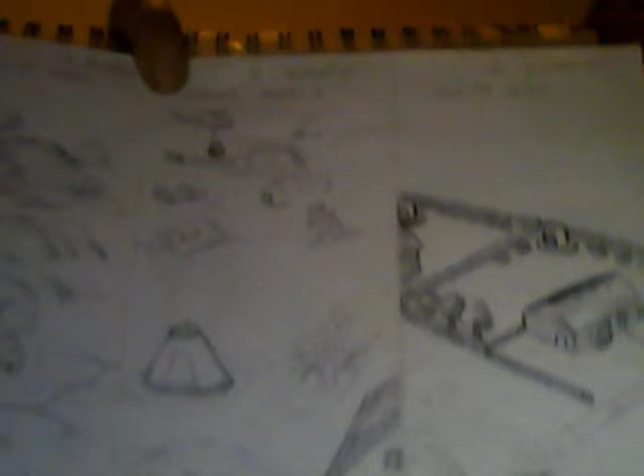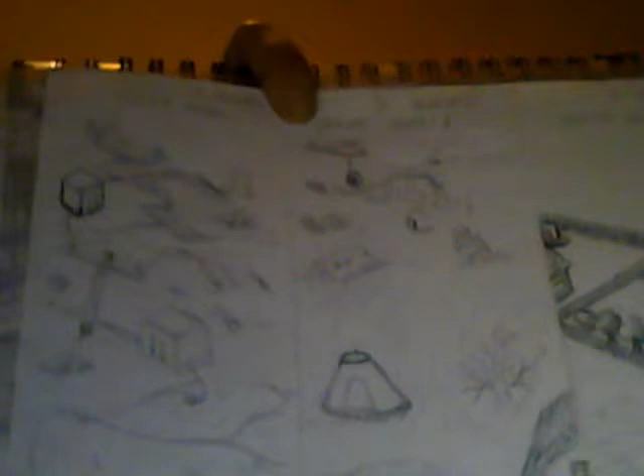First, I'll talk about the Stage 1 life pod, and then we will address the Stage 2 life pod that can be deployed from helicopter, plane, or boat. And then the Stage 3 life pod that can be deployed also by plane, helicopter, or boat to areas that are cut off for rescue or assistance during a disaster.

The Stage 1 life pod is a wonderful structure that I feel could bring some sanity to the environment that we are in now, with natural disasters on an uprise and a lot of people starting to question how and where they live.

A Stage 1 life pod is designed to go into any backyard. As you can see, it doesn't look that bad, but we can do other things to make it look more appealing to your neighbors. But when it comes to one's life, I feel it doesn't matter.

A Stage 1 life pod is designed to be sitting in a saddleback foundation. A saddleback foundation is a system I've coined. I don't know if anybody else coined it, but I coined it years ago. It's called a saddleback foundation. I think all homes in flood zones should be designed this way, but for now, let's speak of this shelter.

This shelter is designed to seat 6 people. There's a hatch at the top for when the rescue helicopters come. They can open it and see if you guys are all okay, or choose to have you get out that way if that's best for them. Also, it can be picked up by helicopter if needed. This structure sits in what is called a saddleback foundation, 6 inches above grade.

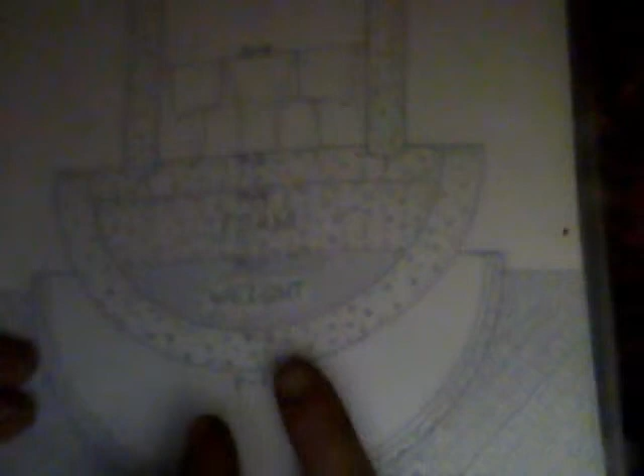There will be 2 wires that connect this structure to this structure, so when the flood starts happening, when the first connection is no longer there, it'll send off an alarm in your home that will tell you there is a flood. When the second wire breaks in this structure, it'll make you aware that the GPS unit has gone off and that soon rescue will come to you. Until then, you can sit safe.

There will be wind-up power in there for those that have cell phones, radios, and flashlights for power, plus there will be a wind-up light in there. This would make it adequate during the times when we don't have those conveniences within our neighborhoods.

There's storage underneath the seats for you to store certain objects of importance during a disaster, or it can be equipped with supplies when sold to someone. These life pods also have a water filtration and food supply with shelving underneath the seats.

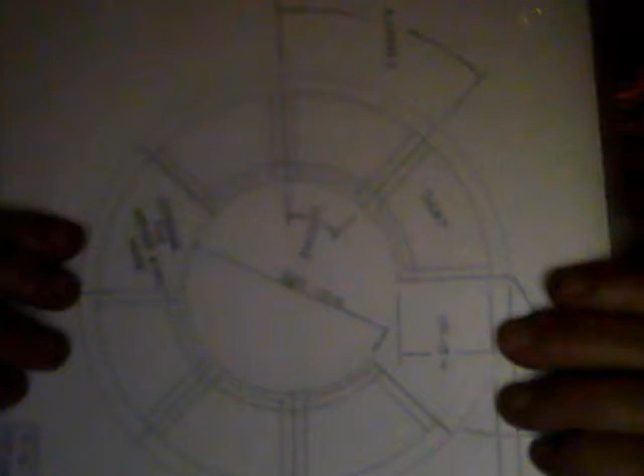The Stage 2 life pod has that same inside, but with more supplies and more storage in the back areas. Now I'm going to show you a Stage 2 life pod.

Stage 2 life pod can be deployed by helicopter, by plane, or by boat. It has anchoring systems above so that you may be picked up by helicopter if needed. It has a beacon light and GPS.

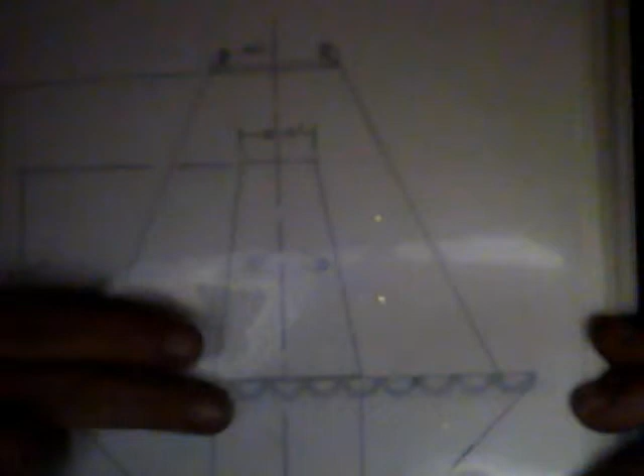When deployed, it also can be deployed with an anchor on the back and a cargo net on the front that is rolled up and lightly tied with twine, so if there's a heavy current, the current will rip the twine, but for deployment out of the helicopter, it'll suit its purpose. That way the anchor can anchor the structure, the net can deploy, and people can find their way inside.

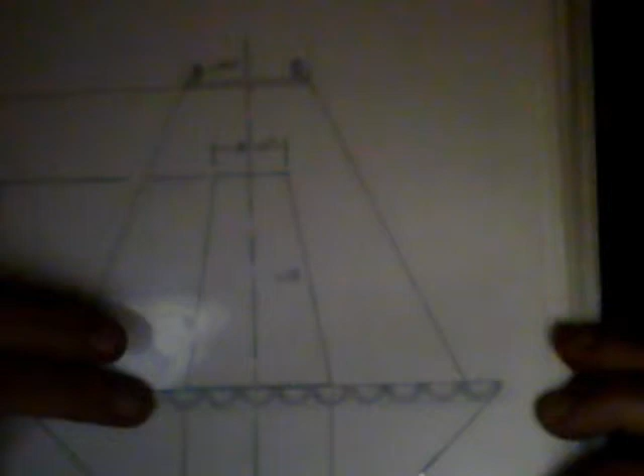The structure also houses 6. The seating arrangement is just the same as in Stage 1.

Now the Stage 3 life pod, I really feel that we could be using back east right now. I've asked so many different companies to come forward with this product. I've got a hold of the Red Cross. I've got a hold of the Haiti president. Left messages for him. During New Orleans, I left messages for New Orleans.

I said anybody that would build this in their community to bring jobs to their community, because of the devastation, we don't have jobs, right? So I said, I'll turn this idea over to your state and let them design and build these and deploy them, as long as they just gave me the rights to say it was my idea and 10% of any said profits, and leave all other profits in the community with the people to help bring growth and prosperity to the communities. This is the Stage 3.

A Stage 3 is designed to house 6 people, sleep 6 people, but unfortunately sit 4. This is a 10 by 10 structure made out of blown plastic, much like the play sets we have in our backyard for our children to play on and our grandchildren. Me being a grandmother, I should know.

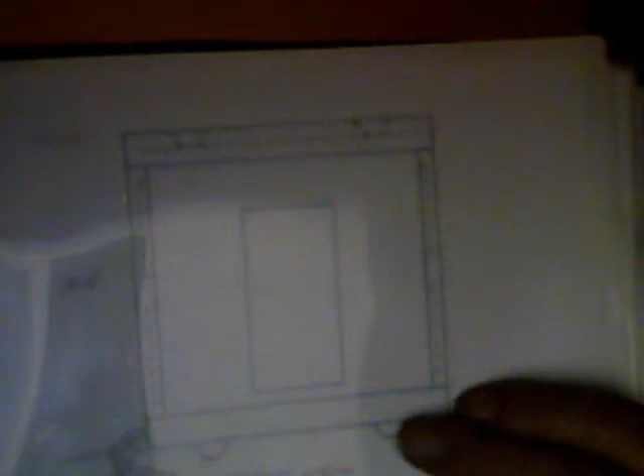It can be either made on site or pre-assembled and deployed as it is now. They can be stacked, so we can pre-assemble and stack ready for deployment at any FEMA agency or Red Cross agency. What is wonderful is this right here is a hose that can extend out, a collapsible hose.

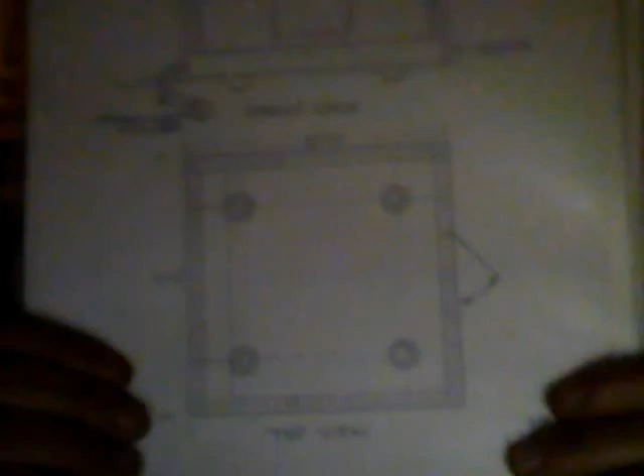It can go in any puddle anywhere around and take the water filtration system and create water in the tanks underneath the structure. As you can see from the roof system, we do have the holes so we can stack them on top of each other, and it also gives us off the ground access.

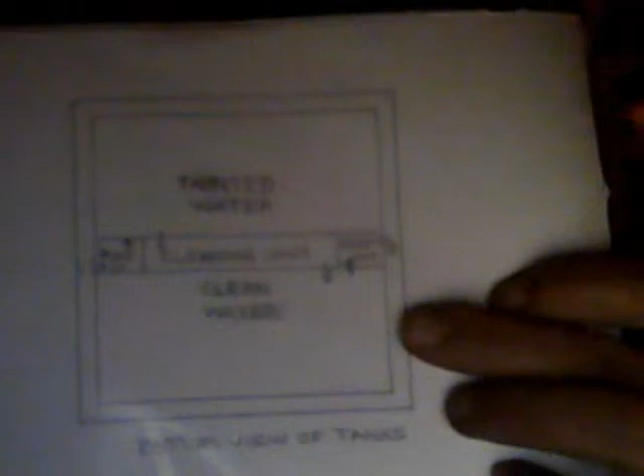Here's the water filtration system. Just a rough draft of how I think it should go, where we pump in the tainted and bring it to the clean. Here's an overview of the sleeping arrangements.

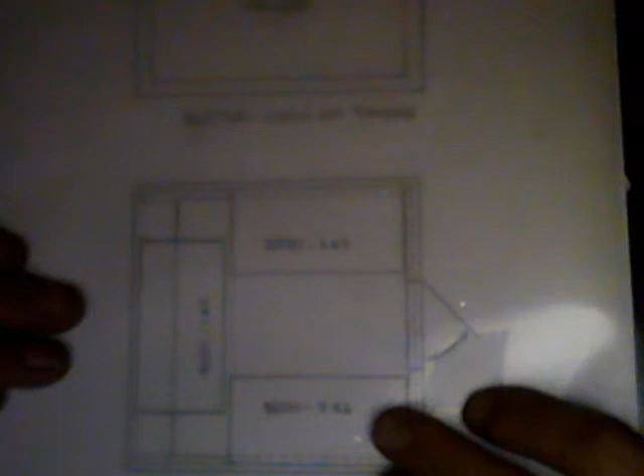These being in a bunk setting, it would suit just fine for the people. And as I said, these here are single beds, not twin, but a single. So that means we got 2 adults or 3 kids on each bed. So in all actuality, even though we sleep 6, we can actually sleep 12 as necessary.

Or if somebody has a favorite dog, the kids can bunk up and the dog can have a nice spot, or a favorite cat. So you're not worrying about your pets when you're waiting for rescue.

This structure would also have wind-up power, plugs, and otherwise, so the people could keep somewhat of a normal existence in the aspects that they're not worrying their family because they're down without power for days on end and without contact from the mainland or whatever the case may be. Because even on the mainland, you can be in a situation where a bridge is out and a community is cut off.

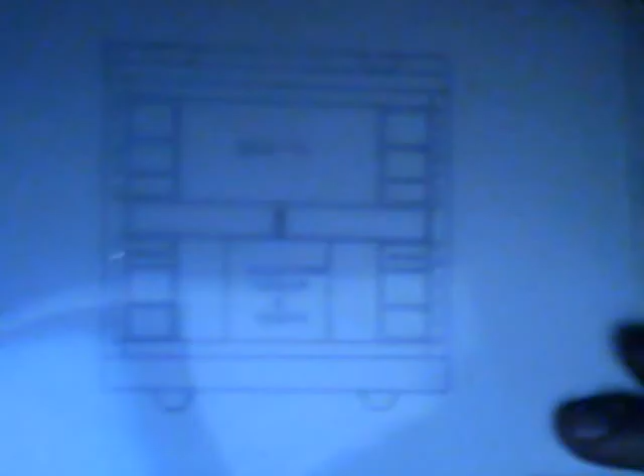This is the back wall of the Stage 3 Life Pod. As we can see here, it has 2 beds, but this here, if you deploy it from a down and up position, you get a bench and a table. Unfortunately, this only sits 4, but think we're feeding people.

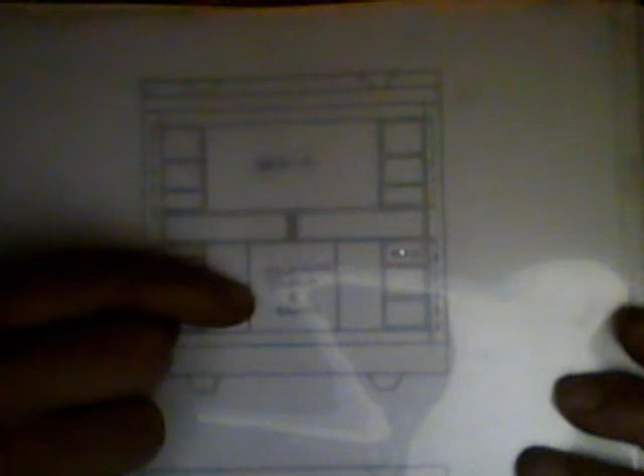If you deploy it from the top down, then it is the bunk bed that we speak of.

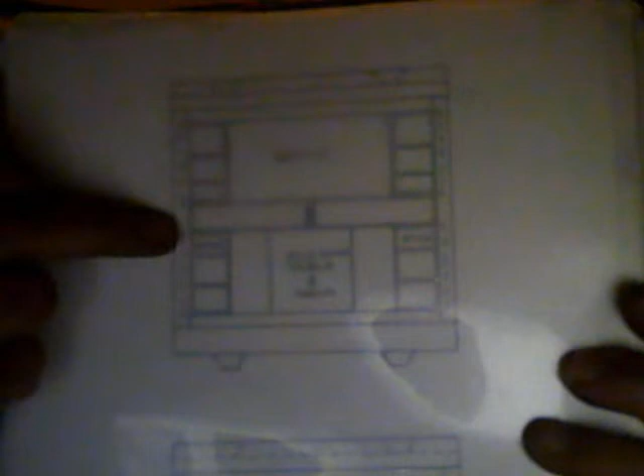These here are drawers that FEMA or Red Cross can equip with supplies for the people to survive on, and clothes and garments or toys, depending upon who they're deploying it to. In one drawer is a stove, and another a sink to take in the water from the tank system.

I feel that these structures could bring some sanity back to an already worn out, burnout society that is dealing with a disaster at this moment on the East Coast. Hurricane Sandy sufferers. I wish I could have got someone to believe in me sooner so that you would have

this shelter too. I do not want money for this product. This is not a money thing. Yes, I have nothing. I'm living off Social Security and making $3.80 an hour when our so-called leaders are making $80 an hour to make that decision.

And I don't think they built as many things to help America as I have. But truly, I'm putting myself out here to save lives.

So any company willing to invest in my ideas or to develop them, please step forward. I'm willing to turn over the majority of control of this product and design as long as I can see it developed and bring sanity where there is none in our communities.

Once again, my name is Mary Butler, and I represent Architectural Environmental Survival Designs for Tomorrow, where we like to say, build to flow with nature, not to resist it, for we must build to live, not to decay. Thank you.